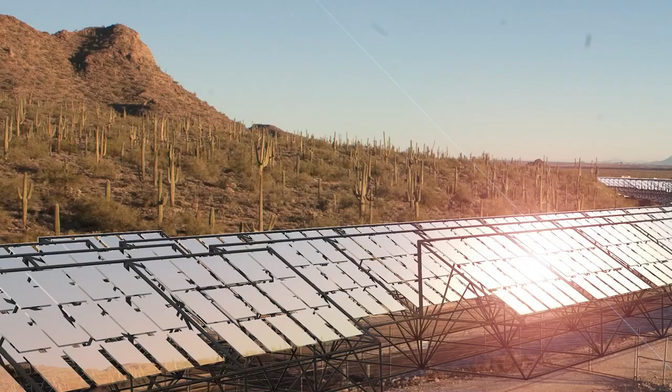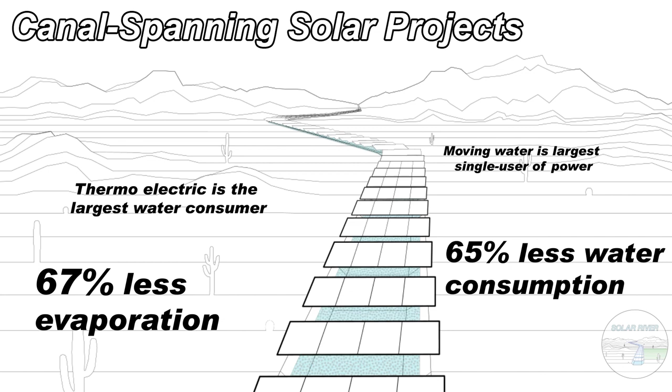This is Christian Sawyer with Tectonicus Constructs, and we're developing the Solar River project, which seeks to cover and power canals with solar energy. Canal-spanning solar projects, or CSSPs, address many of the major problems at the water energy nexus. Moving water is the largest single user of electricity in the western United States, and thermoelectric power generation is the largest consumer of water. CSSPs consume 65% less water than thermoelectric power and can reduce 67% of water evaporation, saving more than 1 trillion gallons of water in California and Arizona annually.

A 1,200-year drought has led to Colorado River water cutbacks, increased dependency on limited groundwater supplies, the federal government paying farmers not to farm, and Lake Powell reaching historic lows, now only 25 feet away from the generators shutting down. This shortage is also expected to drive up the cost of thermoelectric energy, making lower water consumption sources of energy, like CSSPs, more competitive. CSSPs also reduce maintenance costs by preventing algae blooms, sedimentation, and water hardening.

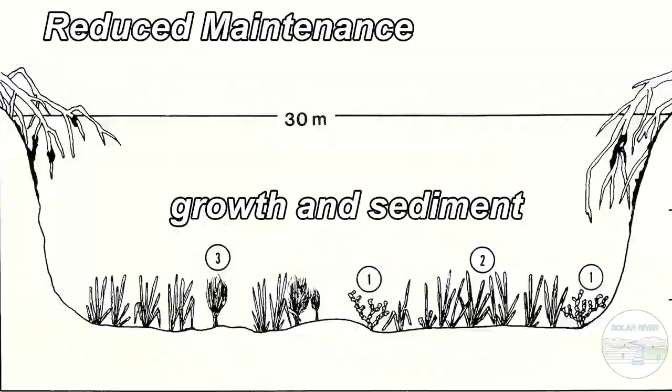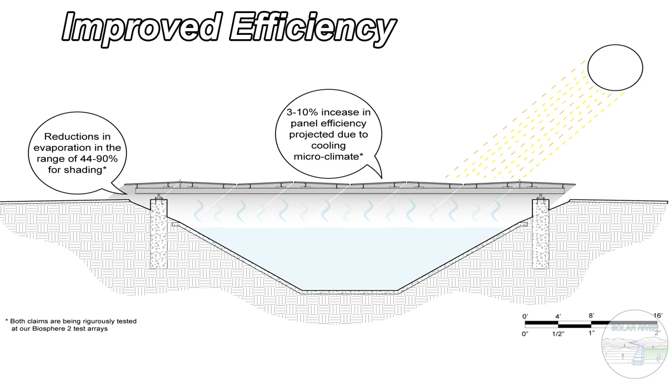In 2021, over 15,000 megawatts of land-based solar projects were rejected due to their impact on natural habitat, landscape beauty, sacred sites, and existing land use. Canal solar is also expected to improve upon typical photovoltaic efficiency due to cooler microclimates created between the panels and canal waters. CSSPs can provide revenue to irrigation communities for upgrading the water efficiency of their irrigation infrastructure, while also enabling the transition to electric water pumps and farming equipment.

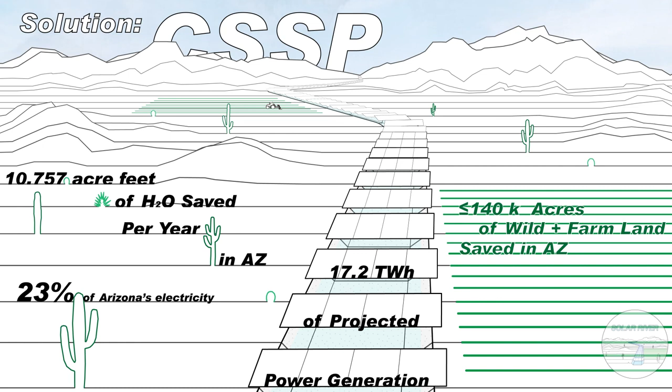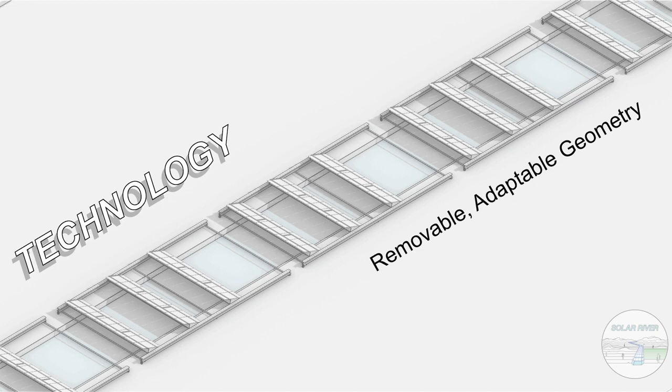To optimize the design of CSSPs, we've created a parametric software solution which adapts to environmental and budgeting specifications. Machine learning is used to iteratively optimize designs for the lowest levelized cost of energy. Generated designs can be used for preliminary studies, feasibility studies, and construction documents. Our software solution now includes a free web-based interface. Users can navigate an interactive map and trace the canal lines where they'd like to model a CSSP. Our app will generate estimates for energy production, water savings, land savings, carbon emission offsets, costs, and LCOE.

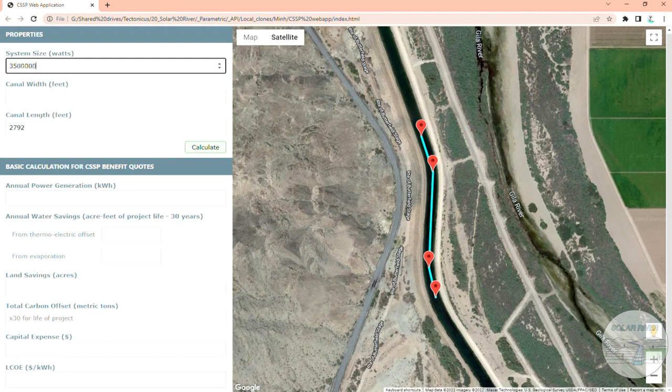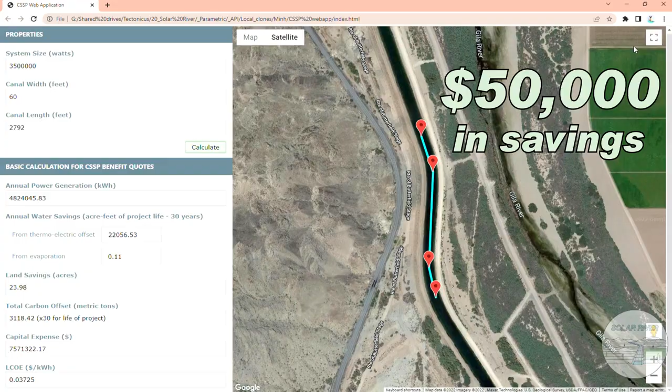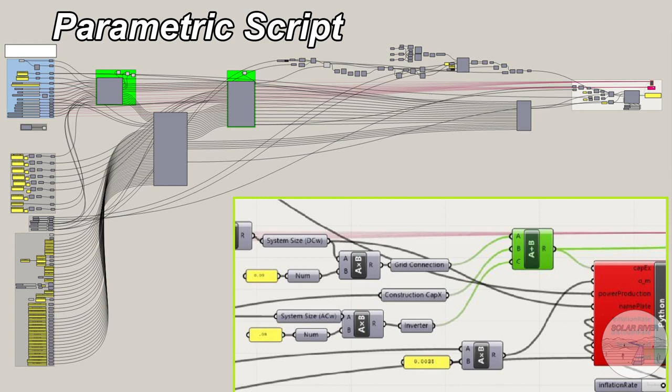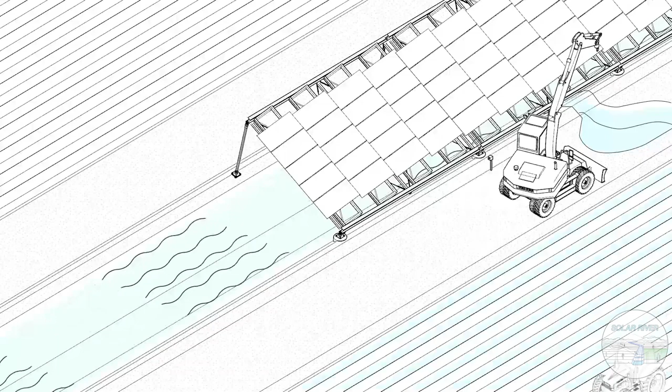This free tool can save interested developers up to $50,000 in feasibility studies and initial engineering fees, eliminating a massive financial barrier for underserved communities. This generated data can be used to apply for grants and loans. Our parametric script calculates solar resource, weather data, structural loads, wind loads, wiring and inverter selection, voltage and string logic, pricing, and optimal LCOE. On the hardware side, we worked with canal engineers to design an adaptable structure with modular parts and a consistent fabrication method which is uncomplicated and safe to build over moving water. Each module can be lifted or removed for routine maintenance or emergencies.

In the Southwest, there are over 150 irrigation districts and over 10,000 miles of canal which could be covered by CSSPs. As water scarcity increases and the demand for renewable energy continues to rise, we expect that low water consumption energy sources like CSSPs will compete with or even outcompete energy sources such as nuclear and natural gas in many areas. The projected market of prime canals is $325 million and growing. Our 3-tiered software solution includes the free web-based app for onboarding new clients, generation of CSSP designs, and full-service engineering assistance from preliminary studies to commercial operation date.

Since receiving our READY award, we've hired 3 additional staff members, landed our first commercial client, the Gila River Indian Community, improved our software to generate designs up to 20 times faster, and translated our code for web app integration. With SET funding, we will increase the predictive accuracy of our web app, create a standalone software product, integrate cloud-based processing, provide the ability to generate models for curved canals, integrate grid connection costs, and optimize the logic for advanced wiring and automated inverter design.

We've established several JEDI milestones for Solar River. The first is to launch our free web app and invite disadvantaged communities to assess their canal's potential for CSSP development. The next is to power Gila River's entire water system with CSSPs and eventually facilitate their transition to total tribal energy sovereignty. We'd soon like to see CSSPs bring electricity to non-electrified rural and tribal communities and enable the transition away from diesel equipment and pumps, which deeply impact the well-being of rural communities due to sound and air pollution.